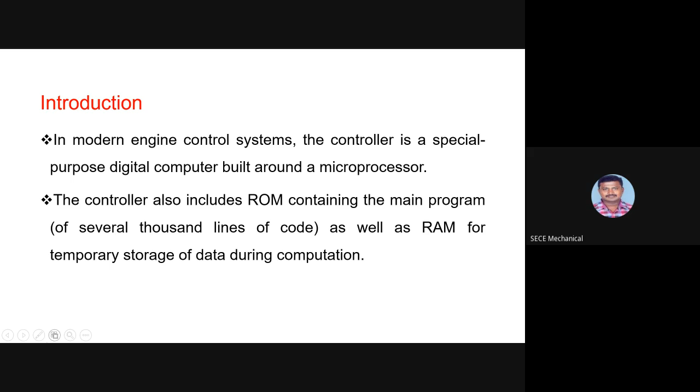As I said, there are many classes, and we have also seen that many of the sensor signals are connected to the controller via input or output subsystems. Similarly, the input output subsystem provides the output signals to drive the fuel injectors, as shown in the diagram below.

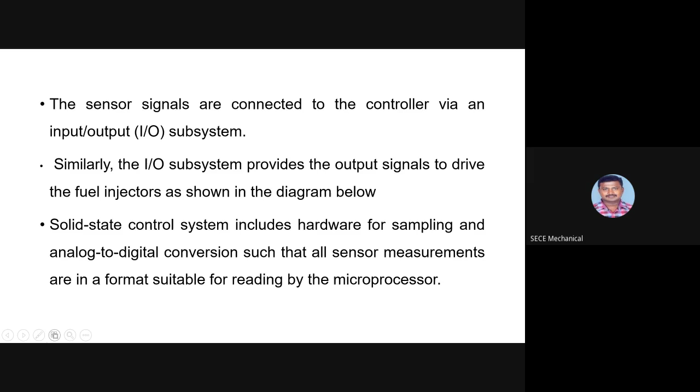A solid state control system includes hardware for sampling and analog to digital conversion, so all sensor measurements are in a format suitable for reading by the microprocessor. So this system is totally a closed loop control system, having input and output device systems.

This is the engine. From the engine we have the ignition. For example, if you are going to use four cylinders, you are going to provide four ignition coils or an ignition control system for each and every cylinder.

Next is the fuel control system, so the fuel is controlled. Next is the mass airflow sensor, where the airflow is also monitored. In between we will have a throttle.

When you press or rotate the throttle, it depends upon the vehicle you are using, whether it's a two-wheeler or four-wheeler or whatever. When you press it, the throttle valve is going to open, and based upon the open angle of the throttle valve, the airflow rate increases.

When the airflow rate increases, based on the airflow rate, the amount of fuel entering into this mixing range also increases, and everything mixes together, and then it passes through the engine during the suction stroke. So here you can see the mixture, and this air-fuel mixture passes through into the engine cylinder during the suction stroke.

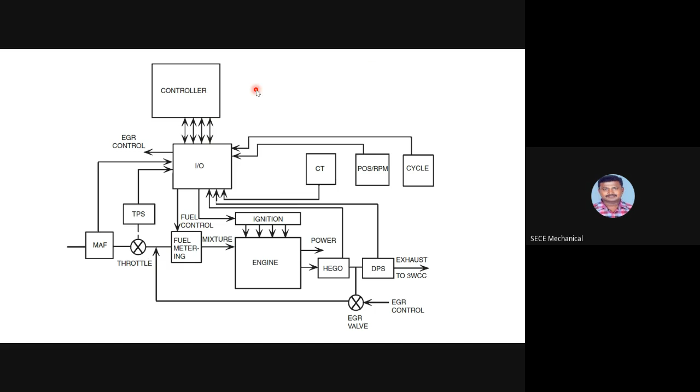Next is the control system. It selects an operating mode based on the instantaneous operating conditions as determined from the sensor measurements. As I said earlier, the sensor always monitors each and everything, depending upon the input received from the sensor to the ECU.

Then the ECU will take care of the torque, the operating mode, and how much amount of air fuel needs to be sent to the cylinder, and whether you need to improve the ignition system and spark timing. Each and everything is going to be taken care of by the ECU. Then the ECU gives some order or command to the actuators.

Within any given operating mode, the desired air fuel ratio is going to be selected. The controller then determines the quantity of fuel to be injected into each cylinder during each engine cycle. The quantity of fuel depends on the particular engine operating condition as well as the controller mode of operation.

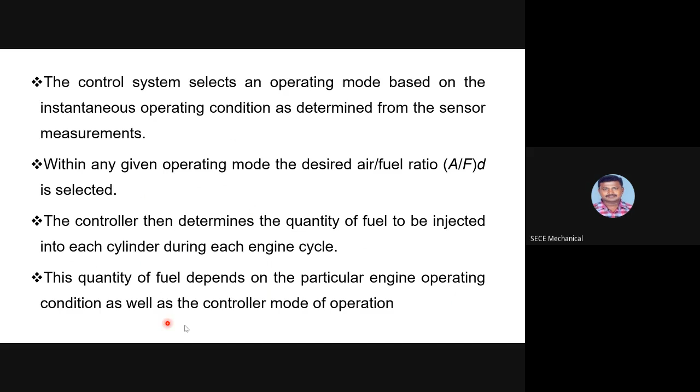So this is engine crank mode. While the engine is being cranked, that means when it is started, the fuel control system must provide an intake air fuel ratio of anywhere from 2:1 to 12:1, depending upon the engine temperature.

The correct amount of air fuel ratio is selected from a read-only memory or lookup table as a function of coolant temperature. Because the program, we have already stored the program for varying load and speed condition of our automotive vehicle and temperature. Each and everything is going to be analyzed and prepared as a program, and it is uploaded in the

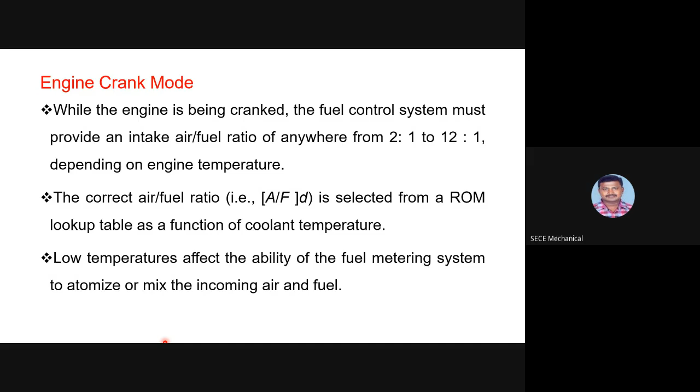microprocessor. Based on that, when the engine is in operating condition, the amount of air fuel mixture ratio and everything is going to be sent based on that. The low temperatures affect the ability of the fuel metering system to atomize or mix the incoming air and fuel.

Next is the engine warm-up mode. While the engine is warming up, an enriched air fuel ratio is still needed to keep it running smoothly, but the required air fuel ratio changes as the temperature increases. Here the control system stays in open loop mode, but the air fuel ratio commands continue to be altered due to the temperature changes.

Finally, the emphasis in this control mode is on rapid and smooth engine warm-up. The fuel economy and emission control are still a secondary concern.

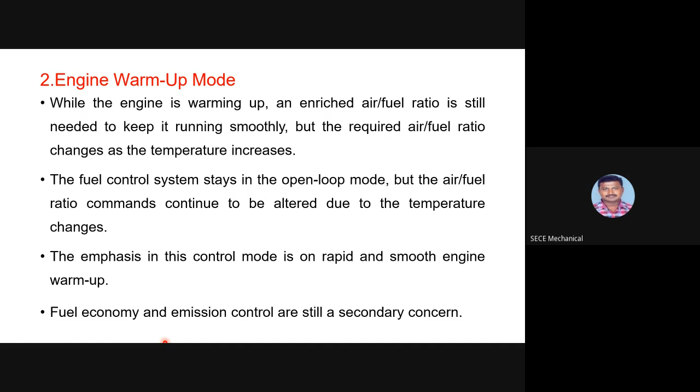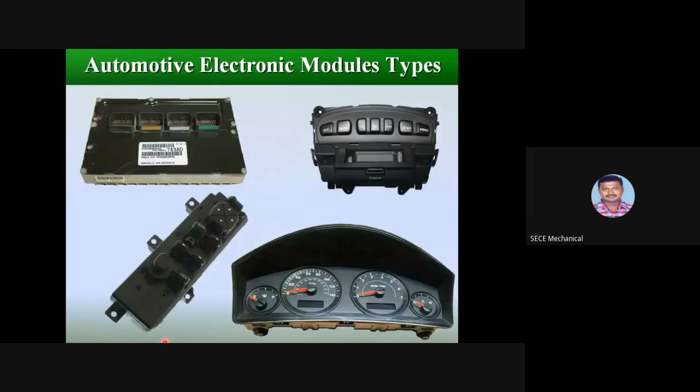So here we have some of the automotive control system modules: body control module, passenger door module, airbag control module, rain sensor module, sunroof module, electronic vehicle information instrument cluster. In automotive electronics, the electronic control unit, ECU, is any embedded system that controls one or more of the electrical systems or subsystems in the vehicle.

The electronic control unit, ECU, is a general term for any of a number of computer modules that receive input from sensors in the vehicle and control different electrical functions.

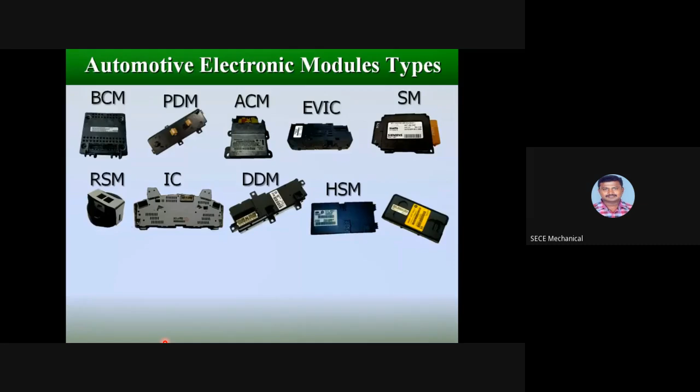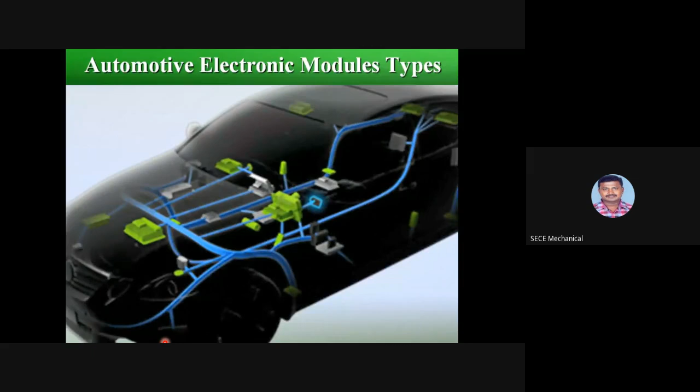They are the computer brains of the vehicle. As autos become more complex and outfitted with more sensors and functions, there can be dozens of different electronic control units at work in a single vehicle.

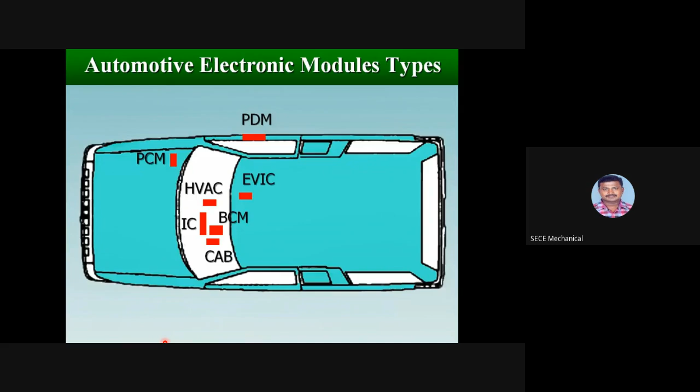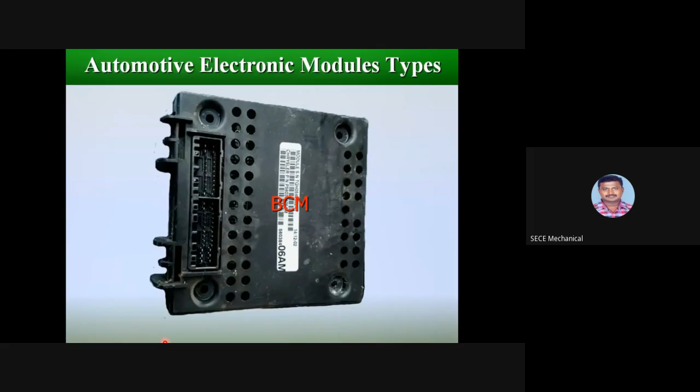The ECU often consists of an 8-bit microprocessor, random access memory (RAM), read-only memory (ROM), and an input-output interface. ECUs may be upgraded by the manufacturer or by a third party. They are usually protected to prevent unwanted tampering.

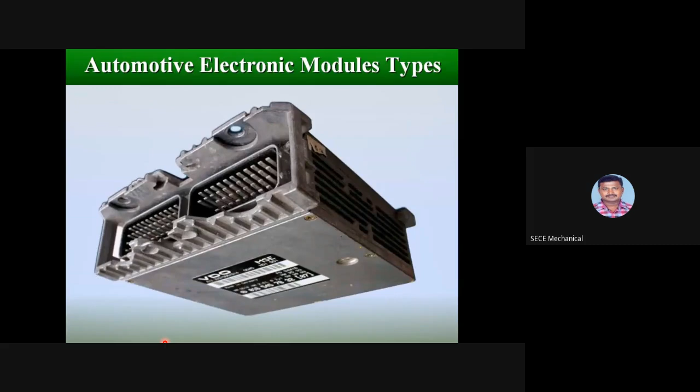Electronic control module types for Jeep Grand Cherokee WJ as example. Body control module, BCM. The body control module, BCM, is attached to the junction block, under the driver's side of the instrument panel.

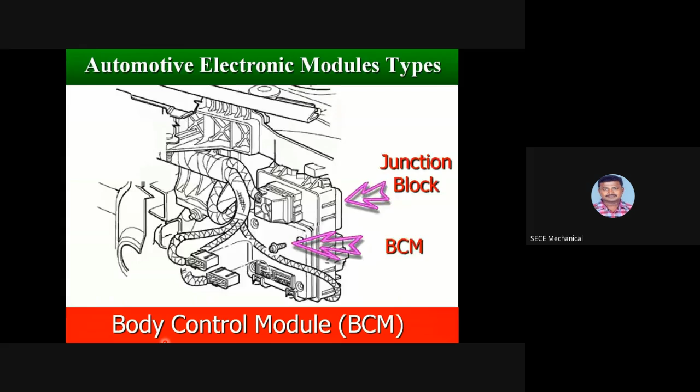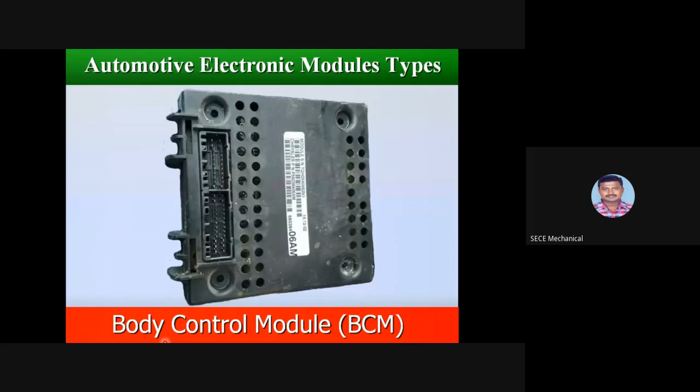The BCM utilizes integrated circuitry and information carried on the Programmable Communications Interface, PCI, data bus network, along with many hardwired inputs, to monitor many sensor and switch inputs throughout the vehicle. The BCM supports many body electrical features such as interior lighting, exterior lighting, intermittent wipers, remote radio, accessory delay, and heated seats.

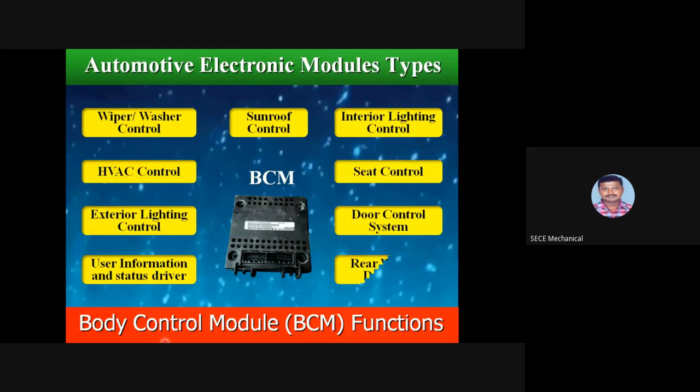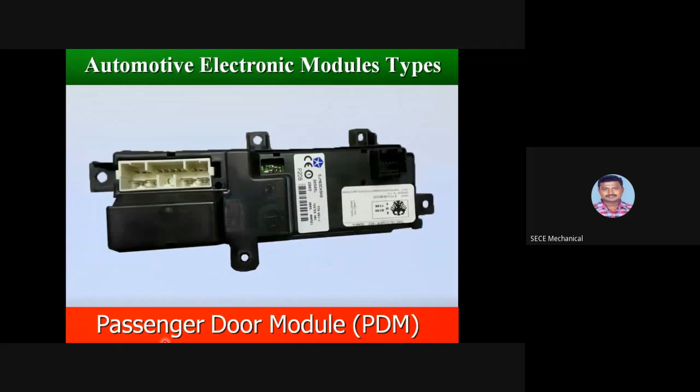Door module, PDM. The passenger door module, PDM, is located behind the right door trim panel, integrated within the door switch assembly. The door modules control various electronic features such as power door locks, power windows, power mirrors, courtesy lighting, and the lift gate lock motor.

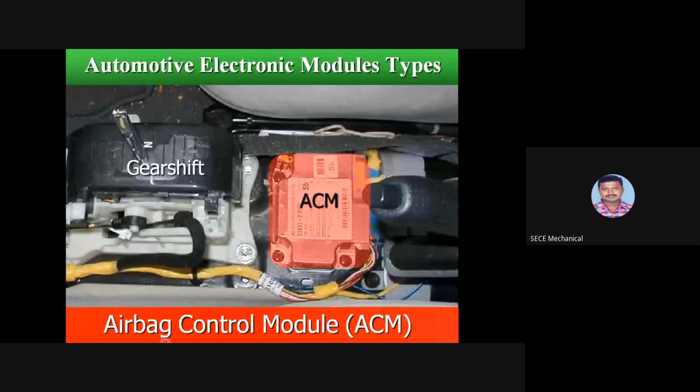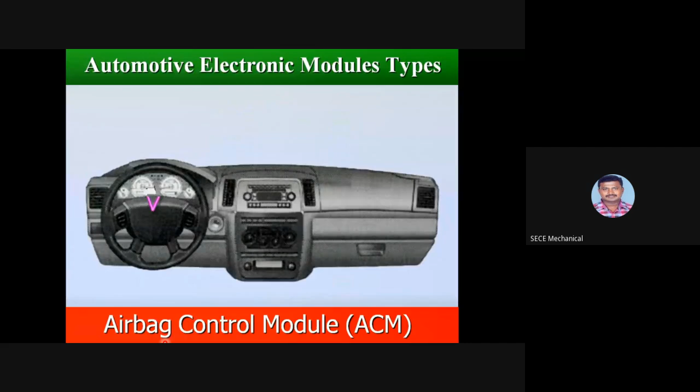Airbag control module, ACM. The airbag control module, ACM, is located underneath the center console housing, behind the shifter assembly. The microprocessor in the airbag control module contains the supplemental restraint system logic circuits, and controls all of the supplemental restraint system components.

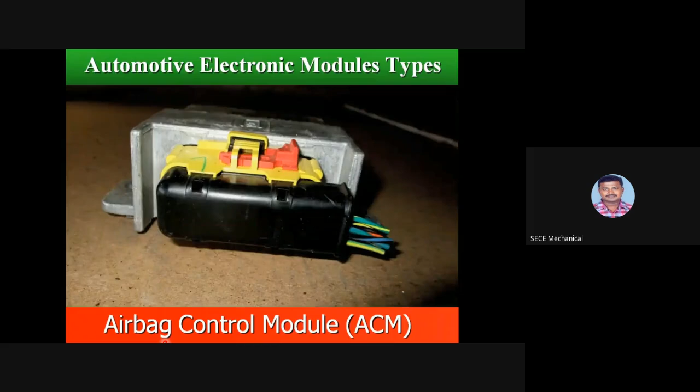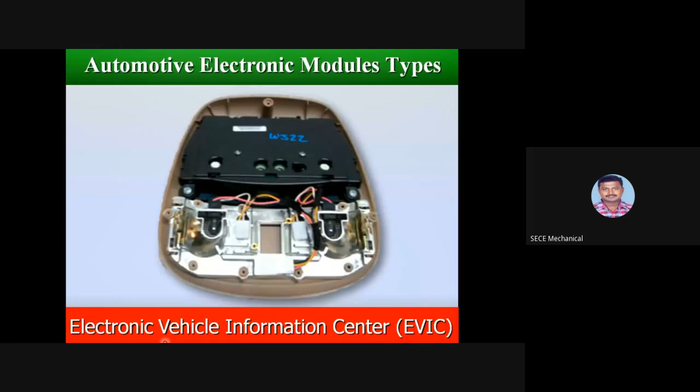Electronic Vehicle Information Center, EVIC. The EVIC module is located within the overhead console. It is an interactive display system that gives the driver some information such as compass, temperature, and trip.

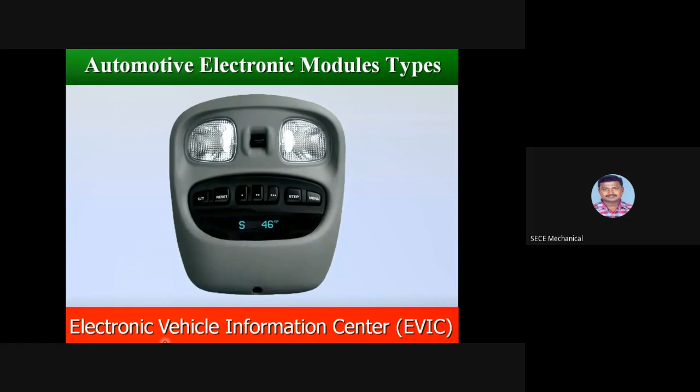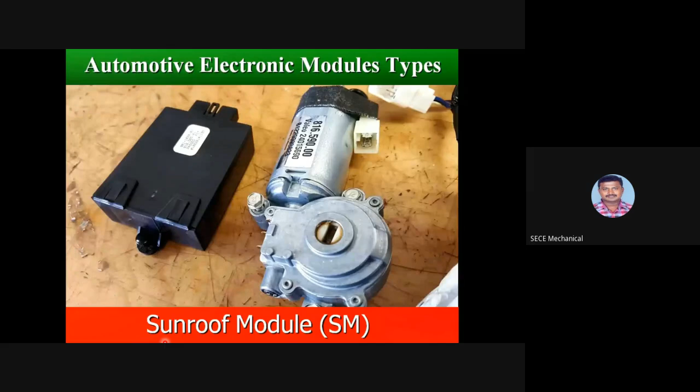Sunroof module, SM. The sunroof module is located in the overhead console as part of the sunroof assembly. It controls operation of the sunroof open, close, and vent functions.

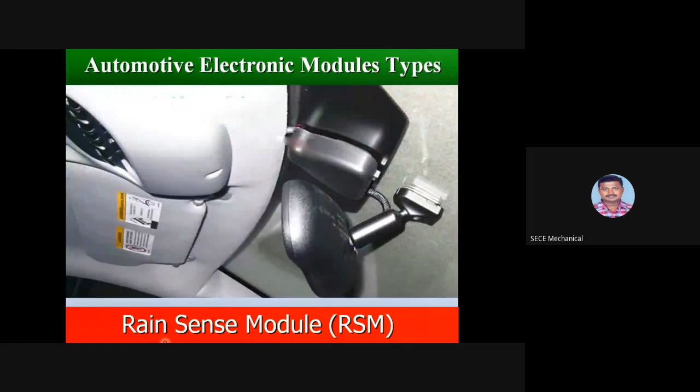Rain Sense Module, RSM. The Rain Sense Module is located inside of the windshield, between the rear view mirror mounting button and the windshield header, concealed behind a molded plastic trim cover that snaps over the module housing.

The microprocessor-based rain sensor module senses moisture in the wipe pattern on the outside of the windshield glass, and sends wipe commands to the body control module, BCM.

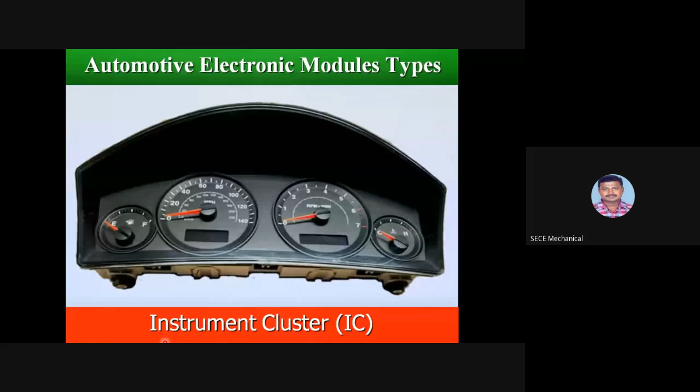Instrument cluster, IC. The instrument cluster is located on the left dashboard. It provides gauge and indicator control. The instrument cluster utilizes the PCI bus to obtain most, but not all, of the information needed to control the gauges and indicators.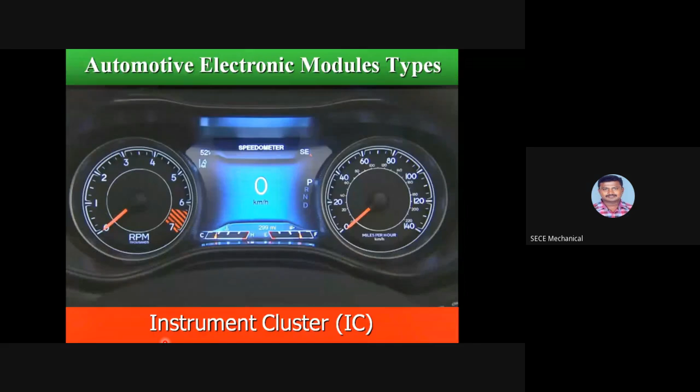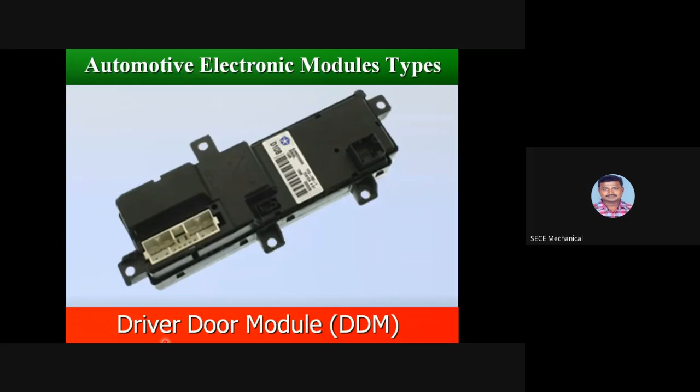Driver door module, DDM, is located behind the left door trim panel, integrated within the door switch assembly. The door modules control various electronic features such as power door locks, power windows, power mirrors, courtesy lighting, and the lift gate lock motor.

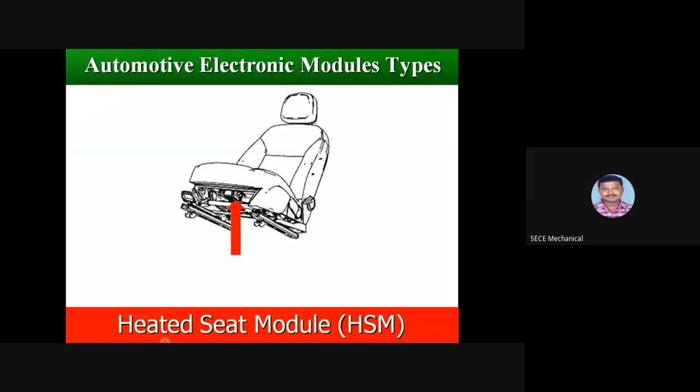Heated seat module, HSM. The heated seat module is located under the driver's seat, mounted on a bracket located between the power seat track and the seat cushion frame. It performs heated seat functions.

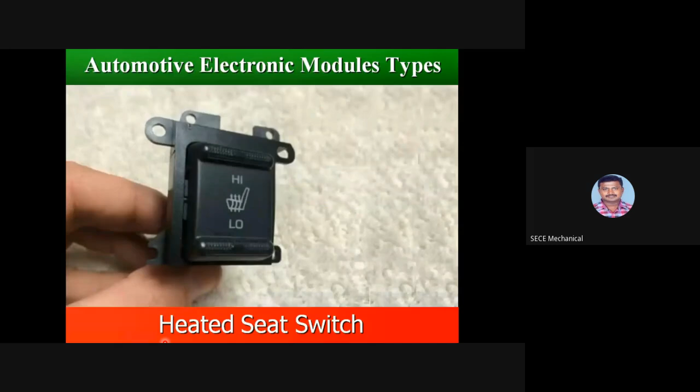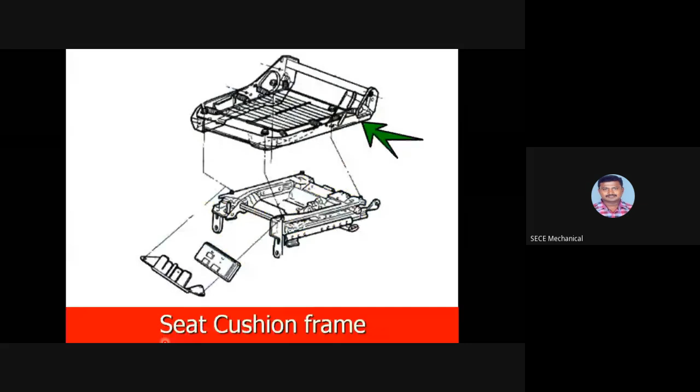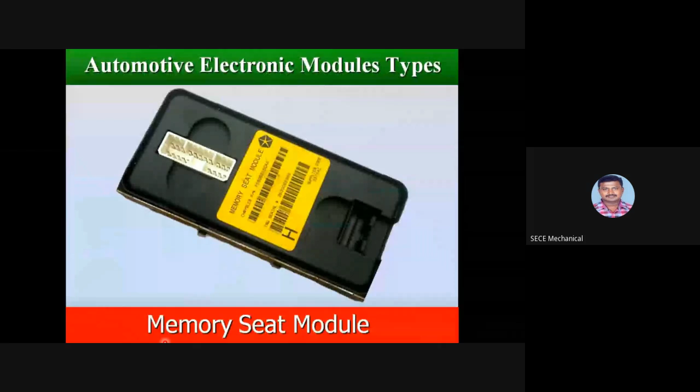Memory heated seat module, MHSM. Its location is under the driver's seat, mounted on a bracket located between the power seat track and the seat cushion frame. It performs memory seat functions and heated seat functions.

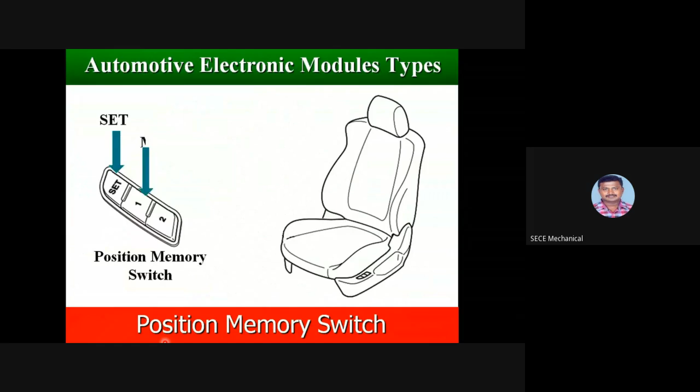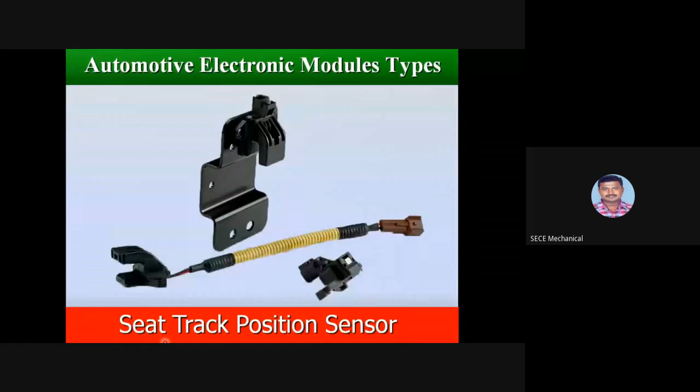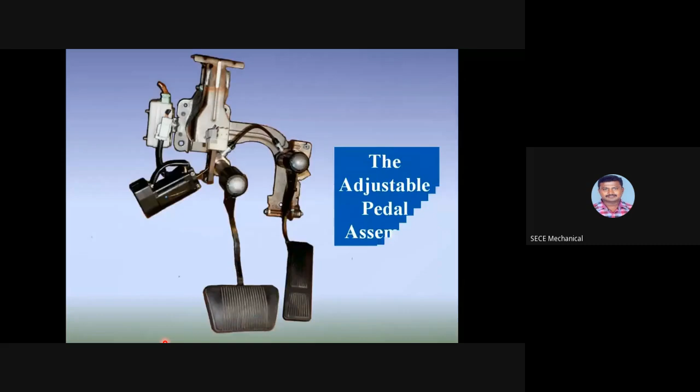Adjustable pedals module, APM. Its location is under the dash above the brake pedal. It controls operation of the adjustable pedals.

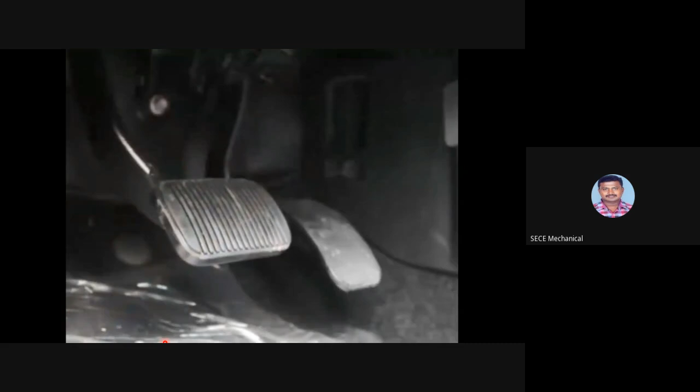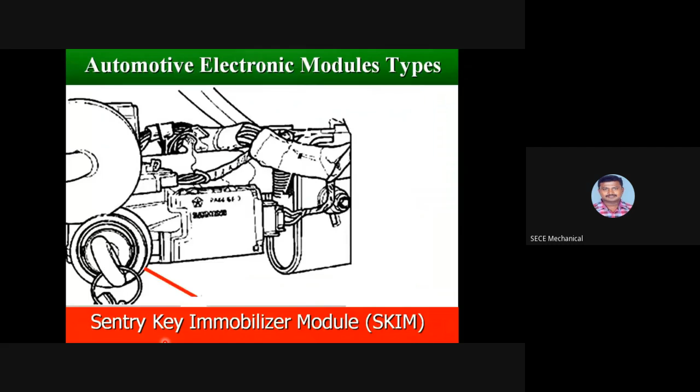Sentry key immobilizer module, SKIM. Its location is under the steering column opening cover, attached to the bottom side of the steering column housing. The SKIM contains a radio frequency (RF) transceiver and a microprocessor. It transmits RF signals to, and receives RF signals from, the Sentry key transponder through a tuned antenna ring integral to the SKIM housing.

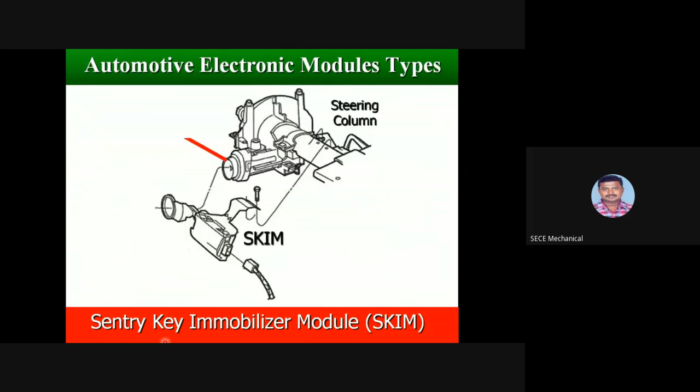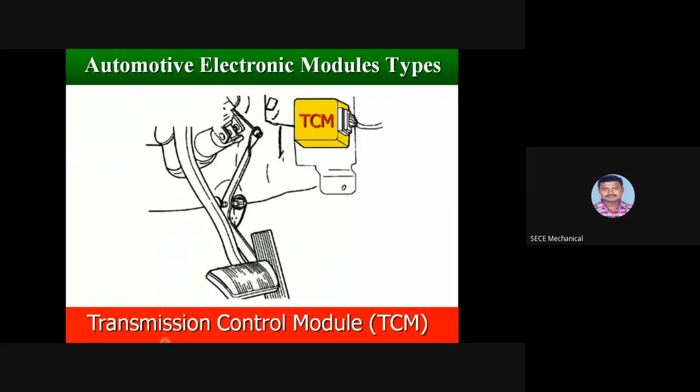Transmission Control Module, TCM. It is located on the right side of the engine compartment near the firewall, mounted to the inner fender, or on the left side of the instrument panel.

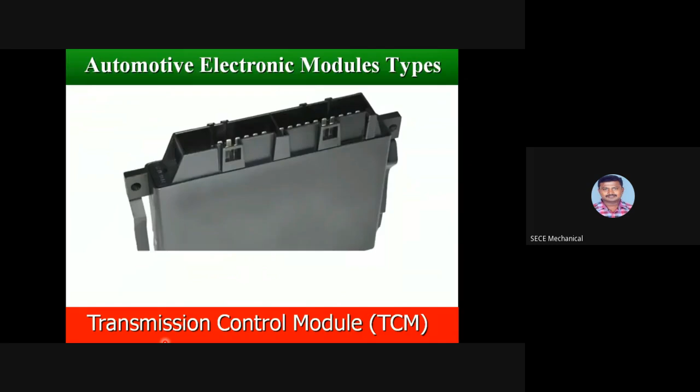The Transmission Control Module controls all electronic operations of the transmission. The TCM receives information regarding vehicle operation from both direct and indirect inputs, and selects the operational mode of the transmission.

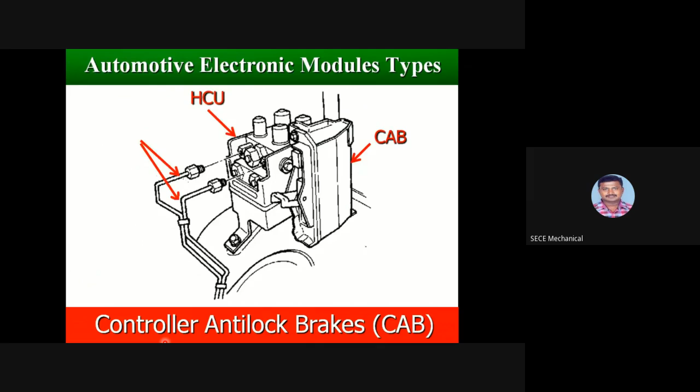Controller Anti-Lock Brakes, CAB, is attached to the Hydraulic Control Unit, HCU, under the hood, in front of the master cylinder. It controls the ABS, and also controls Electronic Brake Distribution, EBD.

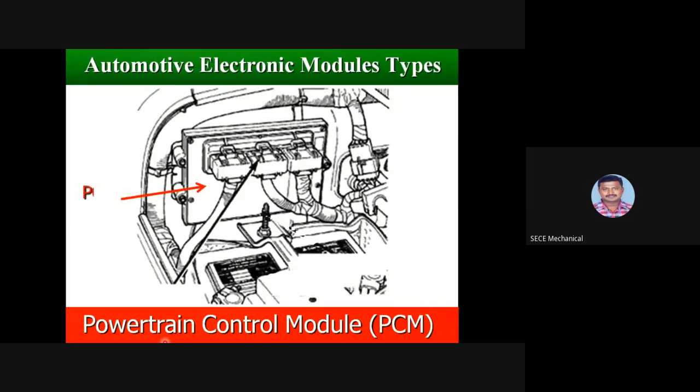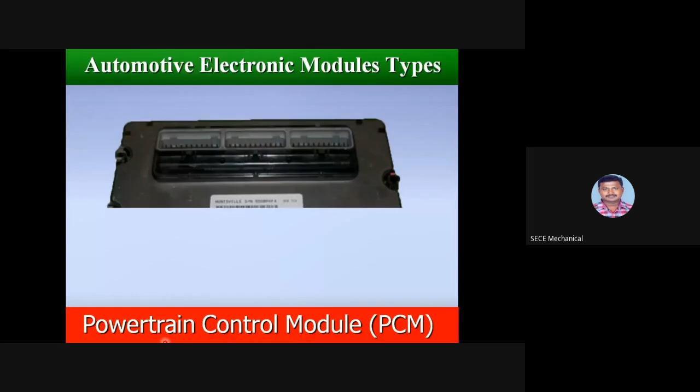The PCM is a pre-programmed, triple microprocessor digital computer. It regulates ignition timing, air-fuel ratio, emission control devices, charging system, certain transmission features, speed control, air conditioning compressor clutch engagement, and idle speed.

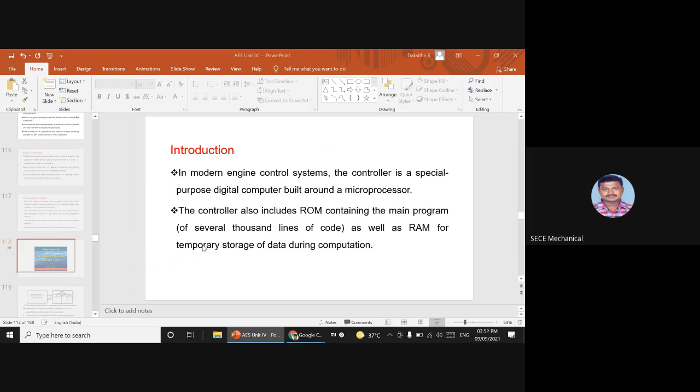Okay, dear students, I think you have a better understanding of the different types of ECUs and electronic control modules used in automotive vehicle systems. A number of control systems, control modules, and electronic devices are used in automotive vehicle systems for different purposes and applications. I think you have seen all the items used in the automotive vehicle system.